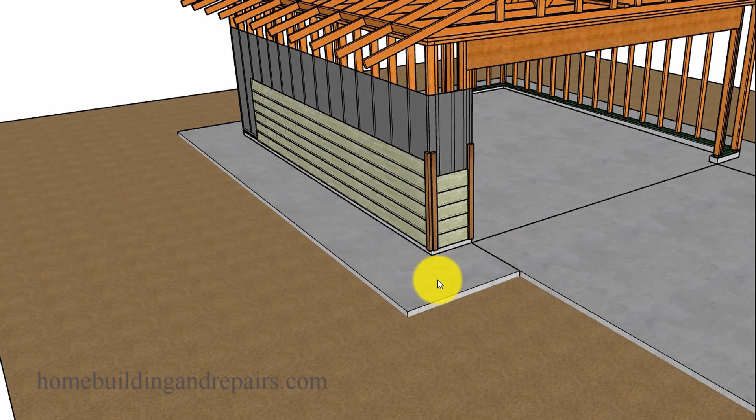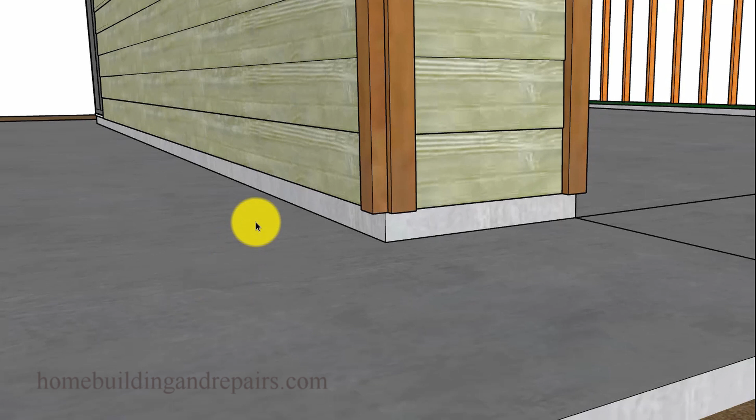Here is another viewer requested video, and keep them coming. I know this one here has been a long time coming. The individuals wanted to know how you could pour a concrete walkway or a patio, something next to a house

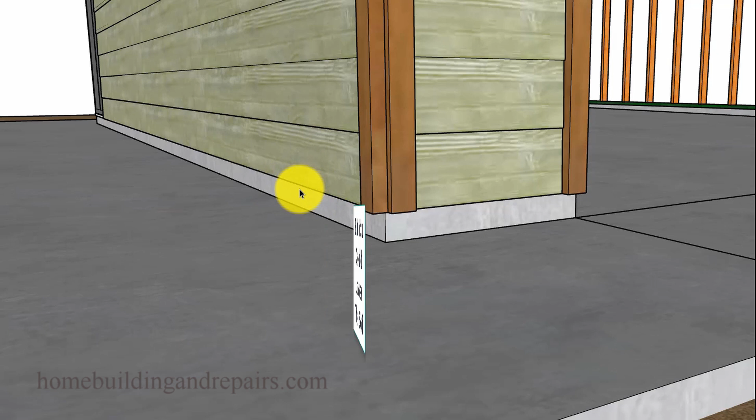with siding to where you wouldn't be covering up the bottom of the siding. So the first thing I want to do is explain why you don't want to cover up the bottom of the siding, and then I'll provide you with a few examples.

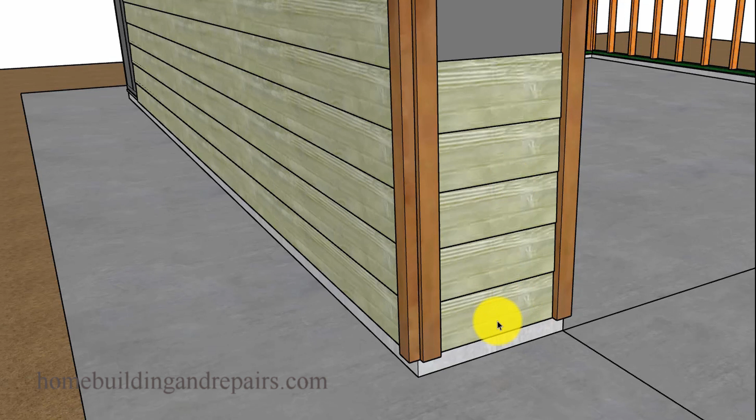So let's go ahead and take a look at, here we have lap siding. It's installed to where the siding laps over the piece below it. So this piece would be installed first, and then this one, and that way the water, when it drains off of it, drains onto the next piece and then down and safely away.

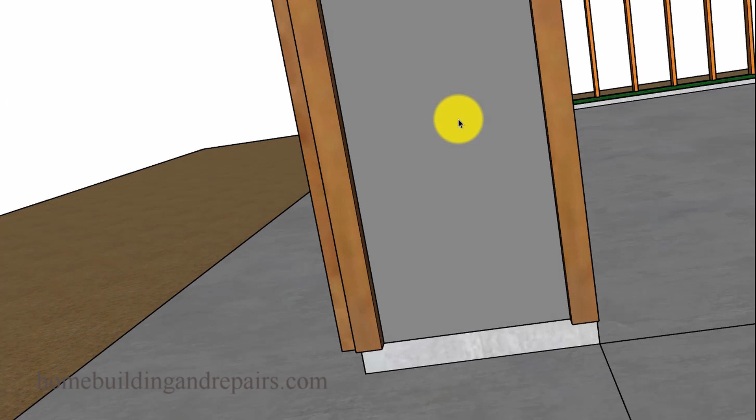And then underneath the siding, we're usually going to have a piece of trim at the bottom to fur out the siding to give it a little bit of an angle to match the rest of the siding. And then of course the building paper underneath that. The building paper is usually going to lap the foundation by at least an inch.

And sometimes you're going to have wood trim around it that will usually lap to match the bottom of the siding. So any water that somehow gets behind the siding is supposedly not going to get trapped behind there. It's going to run off of the water-resistant paper. Not waterproof paper, let's not get carried away here. This paper is water-resistant, and hopefully the water will drain away safely.

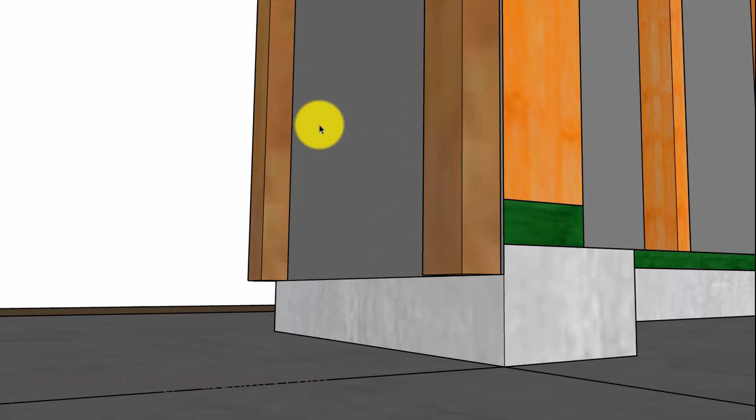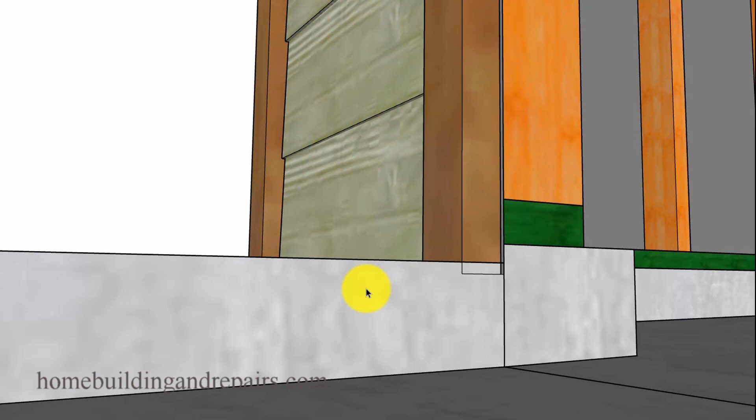And that is the reason why we do not want to have the concrete above the siding like you would if you poured the concrete above the bottom of the siding. So here you can see where any water that is behind the siding - I'm not suggesting that any water that gets over the siding that's on the front is going to get trapped. This water could actually just drain away.

Any water that gets behind it could actually get trapped in this area. And that might not be a big deal. Your wood at the bottom here rots, you could always get a Sawzall and trim this off. You could always trim that off before you poured the sidewalk. But again, you're still creating a situation where water could get trapped and remain in a certain area for a long period of time, creating wood rot eventually to the framing and to the siding.

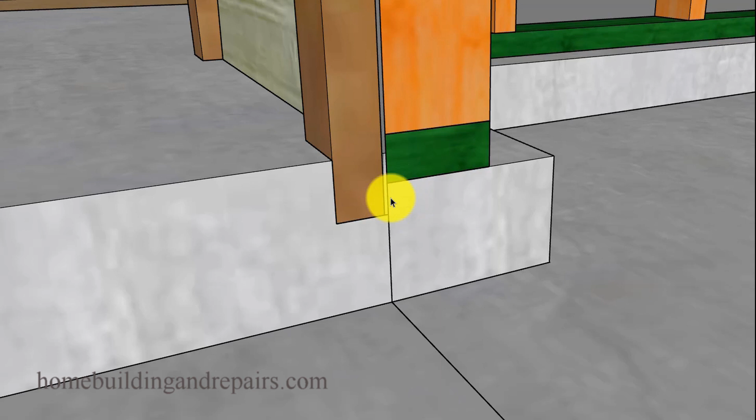Now let's take a look at a cavity that you could actually create by pouring the concrete around the siding. So here we've removed the trim and the lower piece of siding, and you can actually see that there's a place built out of concrete here that could trap water for a long period of time.

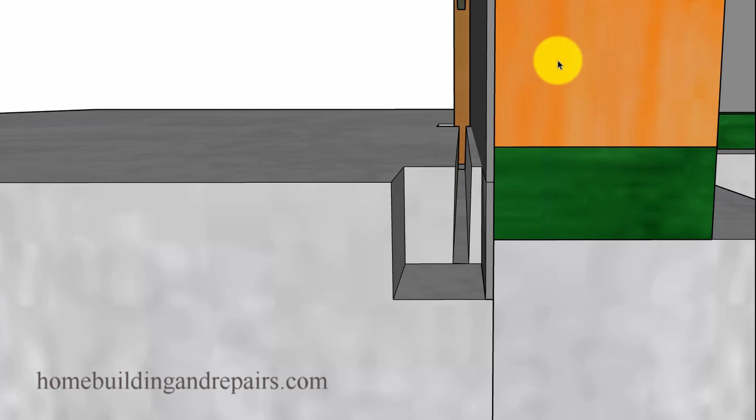And this isn't going to be a problem if it's not around the siding. So if somehow you had siding coming down a little further and the framing is above, maybe, so let's just say at a situation to where this was the height of the sidewalk, and then this came up another foot because it was built out of block or concrete, something like that. You're not going to be affecting the wood framing. And then that might not really be a problem.

You're just going to end up with the siding falling apart or disintegrating over time. So I'm not about to suggest that a situation like this is going to ruin the house framing all the time. It all depends upon how the home was built.

Now let's take a look at my first suggestion, and this one here I'm not 100% happy with because it's going to create a trip hazard, but I want to just show it to you to get your mind starting to wrap around how you could create some type of a little culvert here to drain the water off, some type of a channel to where you're going to be draining the water off.

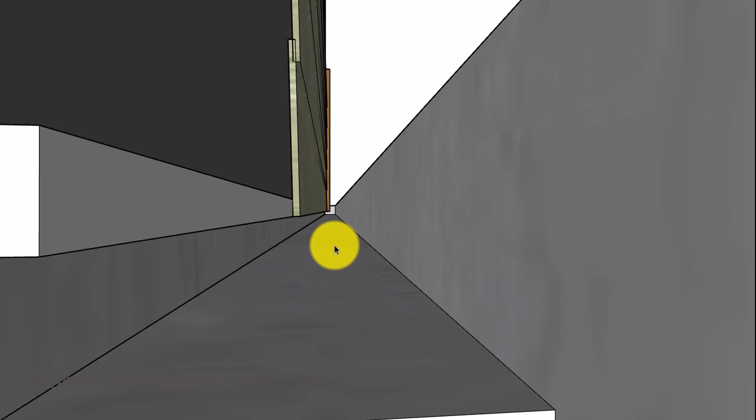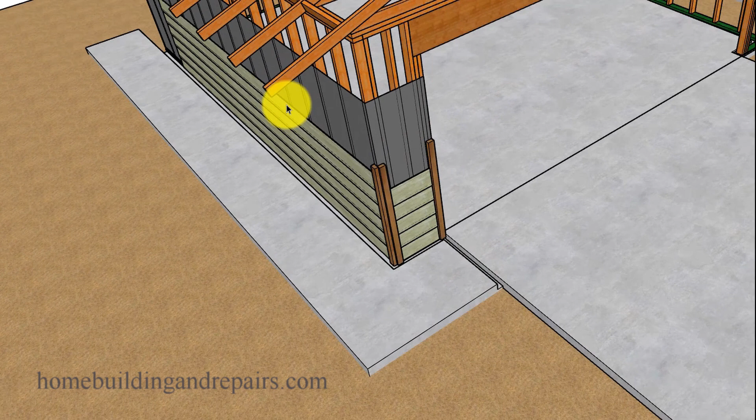So any water that would come here, you could have this sloping towards the front, or you could have it from here sloping to the back, draining off, or draining off here depending upon your property. So here we would have the water that would come off the siding here would come down here and around here and exit safely, as long as debris wasn't getting trapped in here.

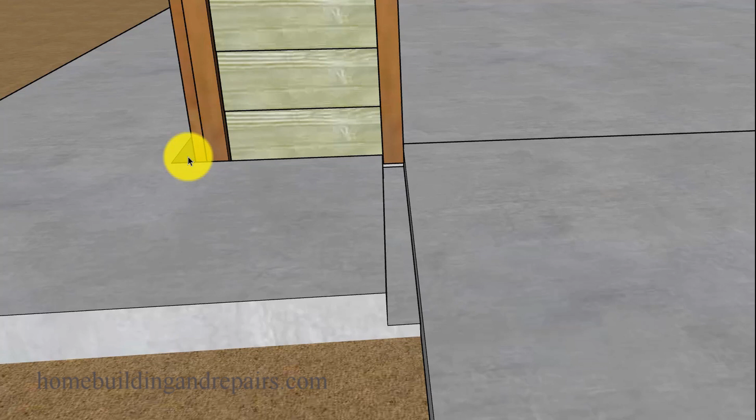If you have a bunch, you know, this channel would have to be cleaned out regularly to function efficiently.

Next up on the list, let's go ahead and install some pipes or put some type of holes through the walkway to eliminate the trip hazard. And you can put as many pipes as you want in there, and you can put whatever size.

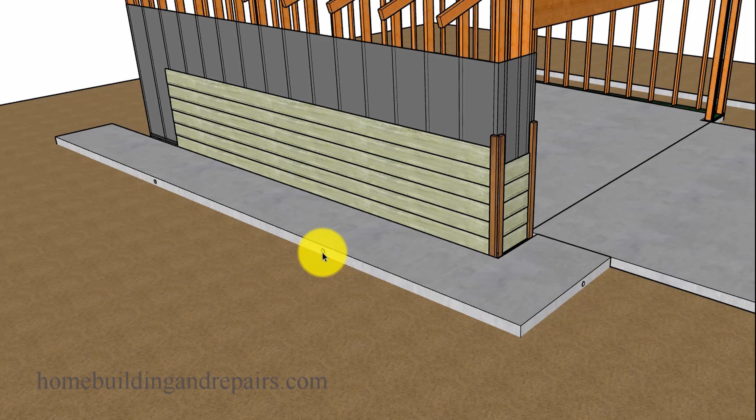I was just at a place that had little 3/4 inch PVC running through the walls for the drainage, and they had them spaced about maybe 5 inches on center. So there are quite a few of them in there, but smaller ones could get clogged. Larger ones are probably going to be a better option. But again, it depends on what your situation is and why you're doing it.

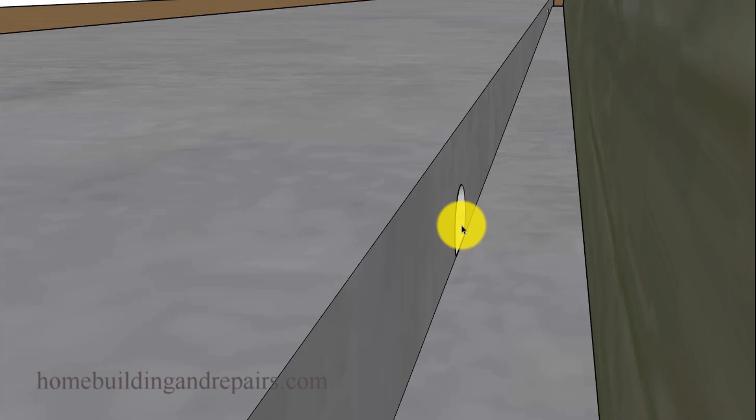So here we would have any water that would get trapped here would be coming out of the pipes here. And again, the channel is going to need to be at least an inch lower than the siding, maybe 2 inches lower if you're going to use this type of method here, because again, debris could be a problem. You build a channel like this, it's going to have to be cleaned regularly. Otherwise, it's just going to end up becoming an area that's going to fill up with debris.

The debris is going to decompose and eventually start rotting away the siding. So sometimes when we build something, we've got to put a little more thought into who's going to move into the house next. You might be someone who cleans this stuff out regularly. The next person might not be.

In our next example, we could get rid of the channel and maybe put in some type of a planter. And these planters can be as large as you want. But again, this is going to depend upon your situation.

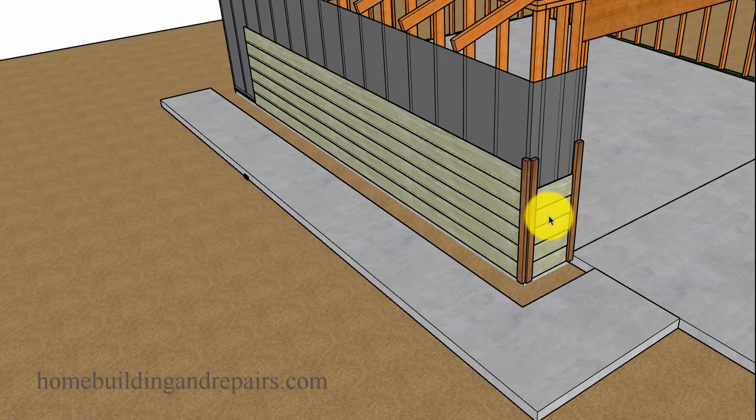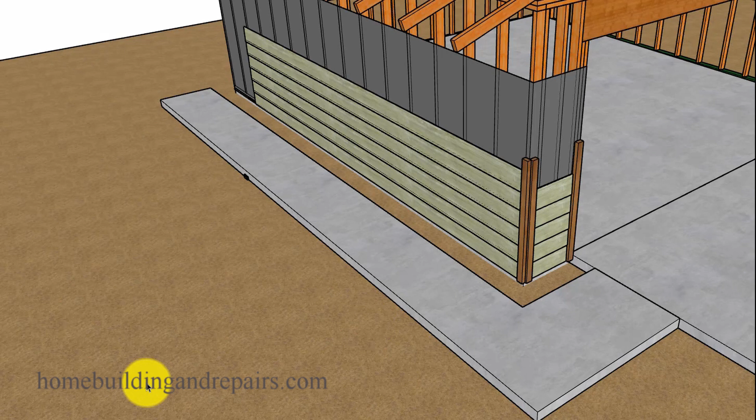I've seen problems like these on buildings where the home is only 10 foot away from another home. You have 5 foot, then a fence, then 5 foot to the next house. And if that's the case, you could still build a 3 foot wide sidewalk and leave the channel. But again, this could still be an area that could collect debris.

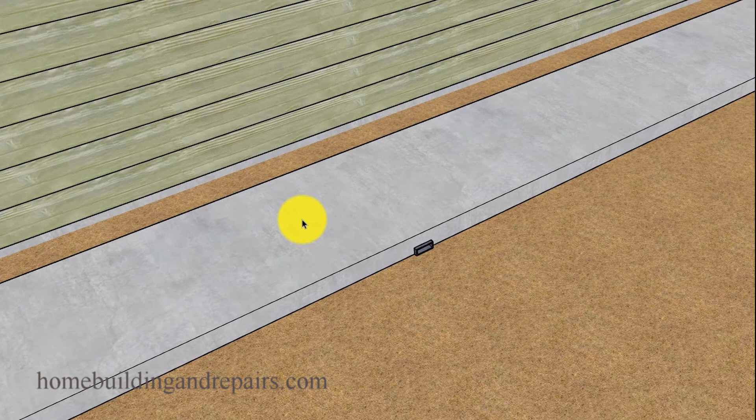So I'm not suggesting that every solution in this particular video is going to be maintenance free. You're going to have to keep the lines open somehow.

So now another thing you need to think about when creating a channel or a planter, and you have a pipe running through it - here I have a piece of metal. You can always use metal instead of plastic if you're looking for something flat instead of round or rectangular shaped like this one.

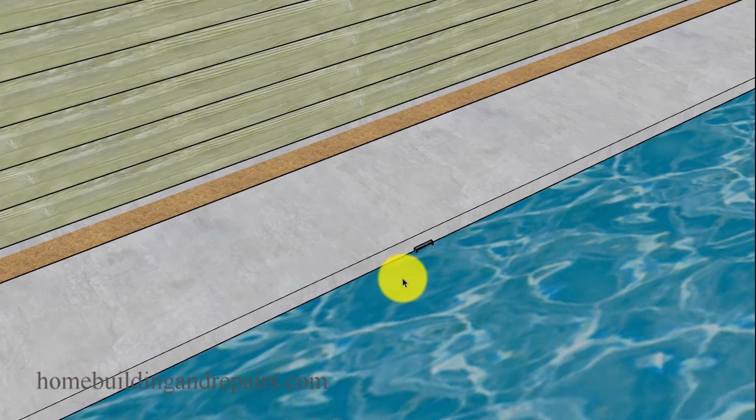And of course, here's where the problem could become a nightmare. You're assuming that the water is going to come off the siding into your little channel and then out this way. But what happens if it floods on the other side? If it floods on the other side, you have a problem with water on the other side, maybe coming from your neighbor. You're going to end up with water coming into your channel area - it's not going to be draining away, it's going to be coming in.

So here's another problem you could run into, and of course that problem could get worse as the water rises. In the previous illustration, we didn't have the water above the siding. You're not going to have a problem if the water's not going to be touching the bottom of the siding and rising.

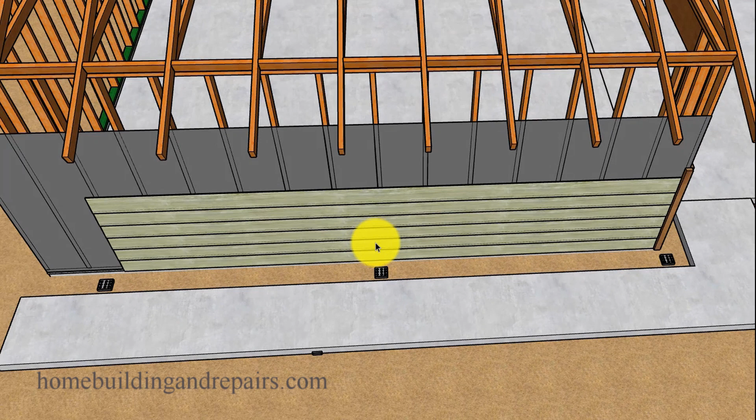And of course, the last suggestion would be to install some type of a site drainage system here. I need to point out that these site drains can be located on either side, as long as you have the pipes or some type of a hole so the water that gets trapped here can drain out of it and then into the site drains.

I've also seen situations like this where they've had to put the site drains in the sidewalk. So again, if you only have 5 foot here, you don't want to put this in - you're going to bury the siding. Then you don't have a choice.

Maybe the site drains in the sidewalk are going to at least shed off a large portion of the water. You could always have it sloping to one side or sloping to the center, something like that, to where you have a site drain that is going to be collecting the water and getting it out of there.

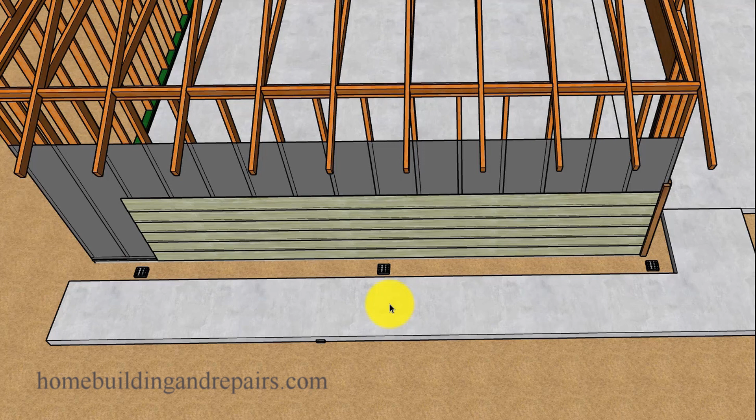Not going to be the best solution, but again, I understand that a lot of people get trapped in a situation where they either can't put the site drains in, or the site drains aren't going to have much slope to drain the water off, and this goes on and on. You pick which one's going to work best for you, or at least reduce the amount of water at the very least. Create a system to where you're draining the most water you can off.

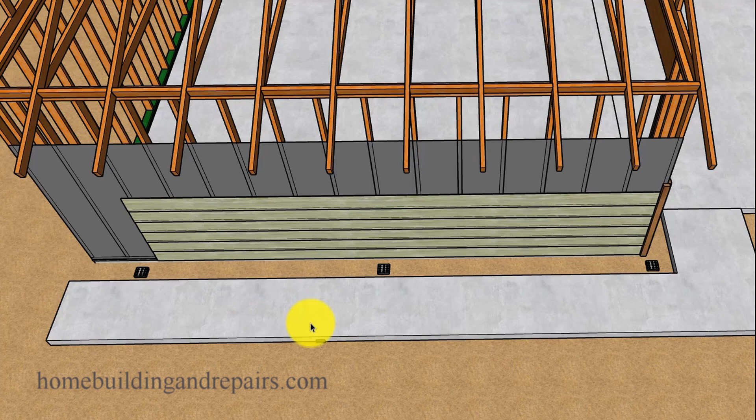And don't forget, gutters are going to be helpful, and the gutters can always drain into the site drains also. The downspouts for the gutters can drain into that. So if you're going to have the site drains located on the other side, make sure that you have your pipes installed in here, or some type of a method so the water can drain over, can get from point A to point B in the site drains.

So let's go ahead and remove the soil. The drain is, of course, going to need to go somewhere, and you're going to want to try and keep it gravity fed if possible.

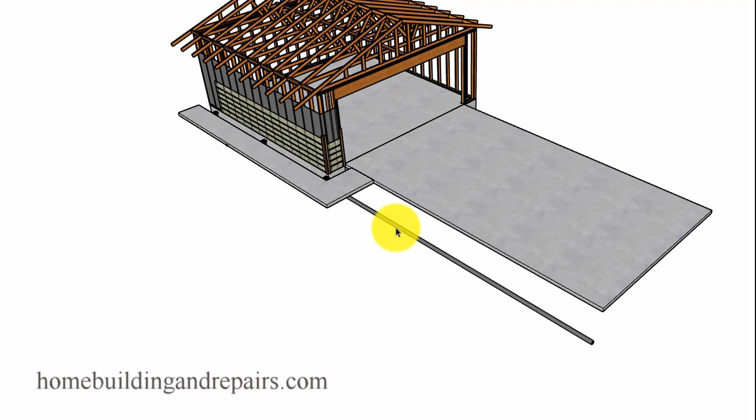But if not, you might need to install some type of a sump pump system, like something you would put in a basement, to get the water to drain into a certain area, and then you would pump it to another part of the property.

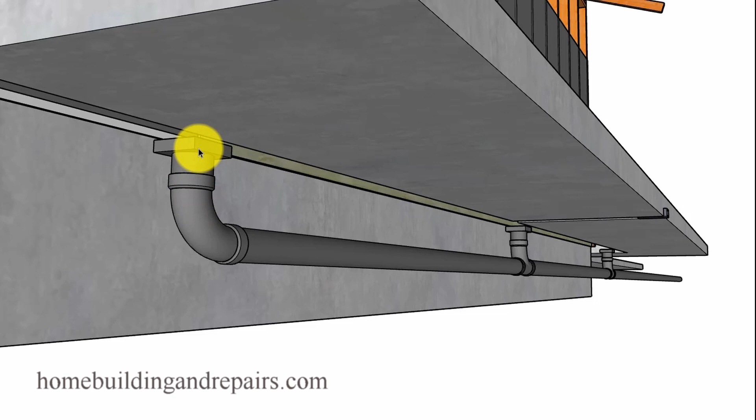So just a straight pipe in this situation with the proper fittings. And then they need to be below the siding.

I've actually seen people come in and put site drains in, and the site drains are above - the soil is below the siding, but the site drains are actually above, and that's not going to do you any good. The water's going to need to drain into the site drains and away from the siding.

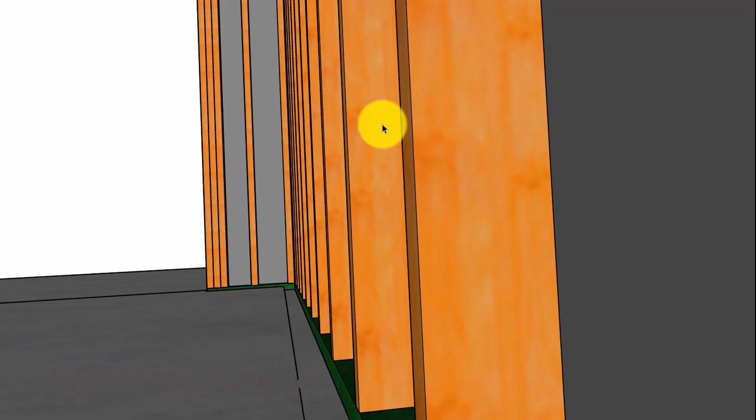Another view of it there, and that wraps up our video. So hope it was helpful.